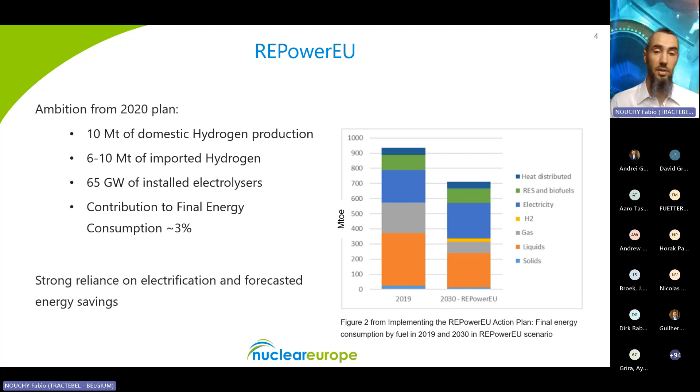So this was the situation in 2020, and this year there was a position on the targets for the 2040 climate goals that has to be undertaken by the European Commission in order to get closer to net zero by 2050. The target is a net reduction of 90% of emissions - still very ambitious, which comes in hand with 20 to 35 megatons according to the different scenarios of renewable.

It's stated clearly as renewable-based hydrogen, so this is domestic production. However, what came back was a redimensioning of hydrogen production at the horizon of 2030. So although we were talking about 10 megatons before, which seems in line with an ambition of 20 to 35 megatons, as Félix said before, the reality seems that both the demand on one side and the projects that are going to produce hydrogen domestically is limited to some 3 megatons. And still, this is still not...

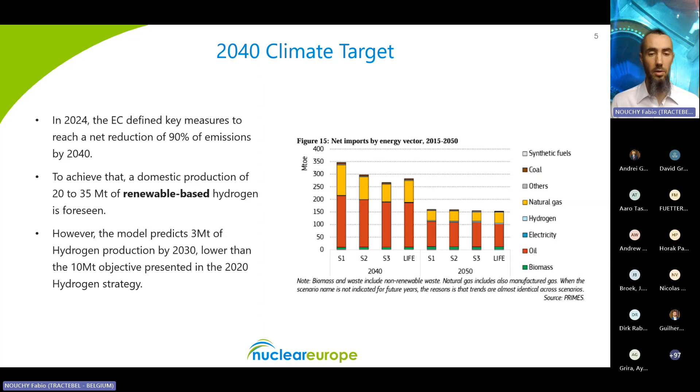So we are going to now dive deeper into the difference between imports and domestic hydrogen.

So just to align ourselves, when we talk about the hydrogen value chain, we often think mostly about the upstream part: the generation of the electricity needed, or the fuel needed as feedstock to produce hydrogen, the transmission of this, and how to convert this fuel or power into the molecule of hydrogen. We must not forget there is also a downstream part, which includes compression and storage, and a transport part if the end user is far from the production site.

And of course, in this ecosystem, a very important part is played by the off-takers. That may be mobility, future stations powered by hydrogen, future hydrogen-powered vehicles, or heavy industry, for example steel producers, or yet other uses like hydrogen as a feedstock for other chemicals, such as sustainable aviation fuels.

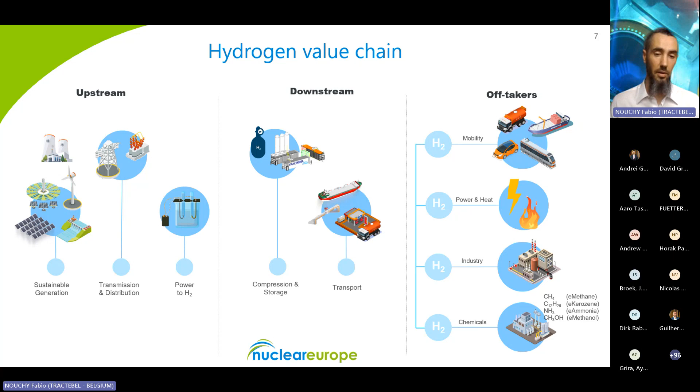So the tendency lately in looking at the overall hydrogen production system has been to leverage existing infrastructure, with some complementary development, by especially leveraging production at those best-in-class renewable fields, which usually are not located in the same place as the end users.

This comes with an upside: the upstream cost, the production part, can be quite reduced because of the possibility to connect electrolyzers directly with renewable fields in areas where solar or wind power is abundant, abating the upstream cost.

However, the uncertainty and impact on the downstream cost is the downside, due to the expenses in compression, storage, decompression, transport, decompression again, and insertion into the local network systems.

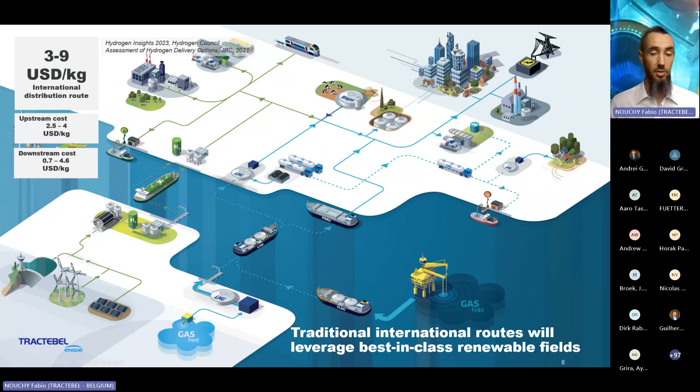So we're already anticipating here the presence of, for those who know Tractebel, the small modular reactor in its place as a cornerstone in the energy ecosystem of tomorrow. On one side, complementing with its flexibility the intermittent renewable energy sources, but also complementing with heat, district heating or industrial heat.

In any case, the point here is that the possibility to be in proximity to the end user would heavily reduce the uncertainty and impact of downstream costs on the cost per kilo of hydrogen.

This is not limited to SMRs, but applies to any domestic production, whether by conventional existing nuclear power plants, it has its advantage, and we will delve deeper later into the upstream costs, how to reduce that part, and what its impact is.

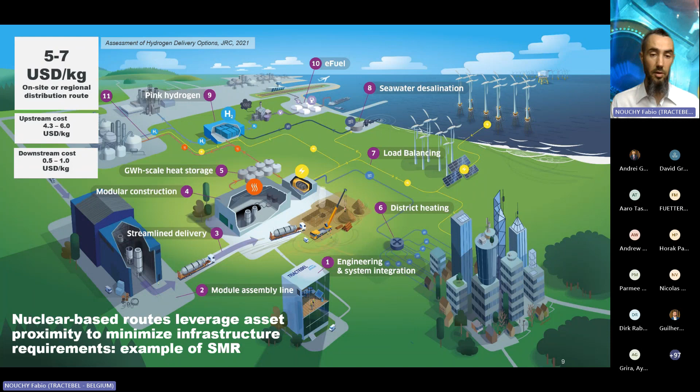So not only economic advantages on one side through the reduction of uncertainties, but also on the other side, the possibility that domestic hydrogen production can offer for the reindustrialization of Europe.

Europe has seen in the last decades a very important loss of value from industry in its economy. That comes hand in hand, unfortunately, with the loss of jobs that are often high-skilled, high-value jobs in the manufacturing industry, and with that, also economic losses.

So there is the possibility of having an energy hub in which end users capitalize from a co-located energy source, with feedstock for their use of hydrogen produced nearby the site.

Of course, this has a lot of implications in terms of security of domestic production, again jobs, overall energy efficiency of the whole system, and of course, this time the possibility of decarbonizing the economy, as it is our target to do.

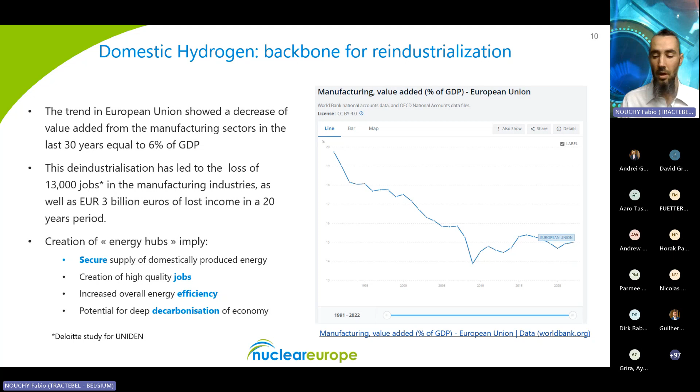So as we spoke about in the slide before, the aspect of using existing nuclear has a very important impact that we want to highlight here.

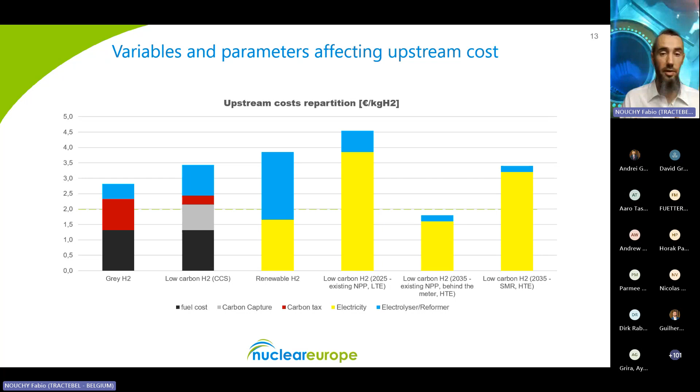What I want to show here is the impact - considering you may have a lot of questions from the slide before - that these different parameters bring to the upstream cost of hydrogen, for which we took a hypothesis on one side of a carbon tax.

100 euros per ton of CO2, which is impactful especially for gray hydrogen, and at the level of low carbon blue hydrogen, the one coming from carbon capture and storage, it's mostly the technology of carbon capture that is raising the price of production.

Renewable hydrogen, despite having the possibility of a cheap LCOE, if coupled behind the meter to the hydrogen production installation - electrolyzers with nowadays efficiency of 55 kilowatt hours per kilogram of hydrogen produced - the impact of the low capacity factor, around 2,500 hours per year versus almost 8,000 hours per year that nuclear can provide, is a big handicap for renewable energy sources.

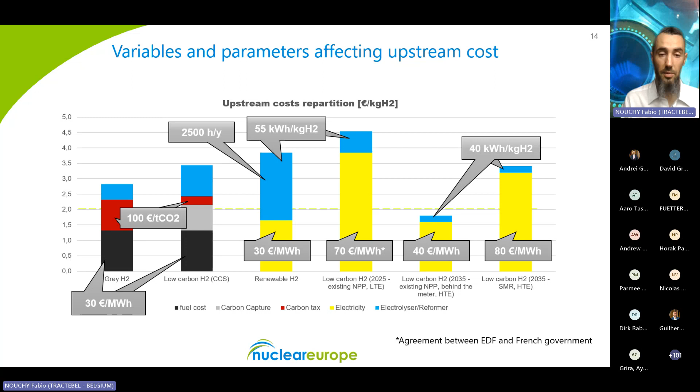I conclude here with the policy recommendations we have in the paper for the European Commission: the importance and focus we must give on diversification in the approach to hydrogen production, highlighting the importance of energy sovereignty.

This diversification is highlighted at the end of this slide with the fact that the nuclear industry is asking for a technology neutral approach when talking about low carbon hydrogen, so that all technology sources should be treated the same way.

For that, you need policies to support financial incentives, regulatory frameworks, collaboration initiatives, and investments in infrastructure, focusing on making the whole system more efficient. This means prioritizing proximity to end users with an eye on cost effectiveness.

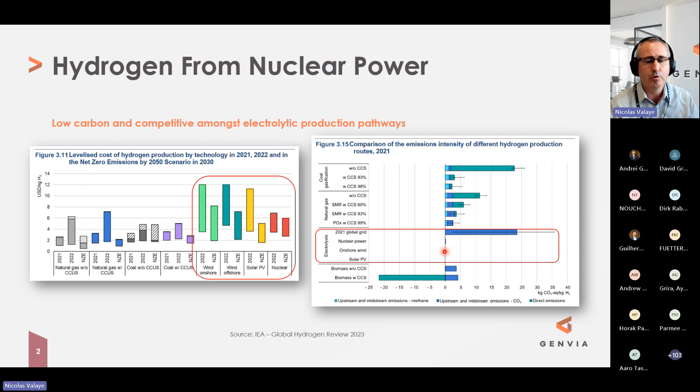Now a bit on producing hydrogen from electricity, the electrolytic production pathways. On this graph, on the left we have low temperature electrolysis with liquid water—technologies like alkaline and PEM. With results from the first hydrogen bank auction, almost all of the projects used either one of those technologies or a combination of both.

Alkaline is the most mature, used for many decades. PEM is newer but has started its industrial phase as well. Both technologies have advantages and disadvantages, but the main thing is we're now starting the industrialization phase and the cost reduction phase.

From a world standpoint, we don't yet have the return on experience with large systems. The first large systems are being planned and funded, but not yet in operation. There's still a lot of learning curve in scaling up for large applications, but the technology is there and is mature, so projects can be initiated if off-takers are secured.

On the right side is high temperature electrolysis. There we don't electrolyze liquid water, but steam—water in the vapor phase. This is sometimes called high temperature steam electrolysis, solid oxide electrolysis, or solid oxide cell, SOEC—you might see all these acronyms. The rest of my presentation will focus more on that technology.

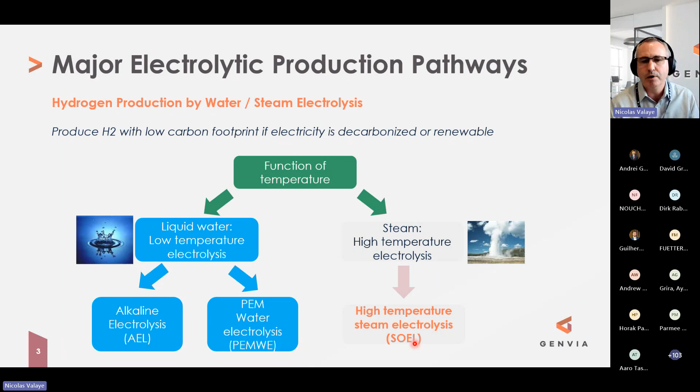In the context of nuclear coupling, which is this webinar's focus, for alkaline or PEM you'd simply connect electricity from nuclear to the electrolyzer. You can do the same for solid oxide electrolysis, but in addition you can valorize heat or steam produced by the nuclear facility. So for solid oxide with nuclear coupling, you do both electrical coupling and heat coupling—I'll come back to why we want that.

What's interesting with solid oxide technology is that at its core is a solid oxide cell put into a stack, with modules forming large systems. The unitary block, the stack, is versatile—this has been demonstrated and used by most solid oxide players. We can use the technology to produce hydrogen: at the inlet you have steam and electricity.

You can also use the same stack, same equipment, same core module in fuel cell mode—called solid oxide fuel cell. There are different applications, particularly maritime, where you supply a fuel such as hydrogen, ammonia, methane, or methanol. At the exhaust you generate power and electricity, but also heat. The efficiency in fuel cell mode is quite good even using just the power, but if you can also leverage the heat, you have a very energy-efficient system.

If you design a system around that stack leveraging both modes, you can have a reversible system. It's called the RSOC, reversible solid oxide cell. You could envision a use case where you produce hydrogen when you have excess energy on the grid or from solar, and then produce electricity back to the grid using fuel cell mode when you don't have that energy source.

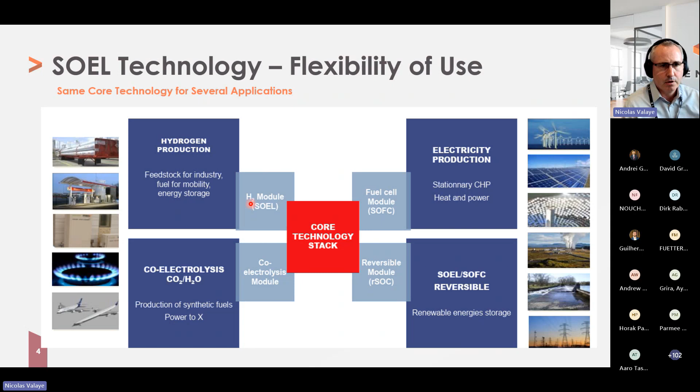Going a bit deeper on the technology, but I won't go further than that—I promise the rest of the presentation will be less detailed technically. One important thing: it's ceramics based, so it can scale. There's no expensive material like platinum, so it's really scalable in terms of materials used at the heart of the technology. You inject steam at the cathode, get hydrogen back, and on the anode you have an air sweep to help move out the oxygen produced on the other side. That's the core of the technology.

The graph on the side is a thermodynamic graph, and I'll use it to explain a couple of things. The promise of solid oxide is up to 30% better electrical efficiency compared to low temperature electrolysis—you need 30% less electricity to produce the same amount of hydrogen. Given that 70 to 80% of hydrogen cost comes from electricity, that's a game changer in the electrolysis world, which is why this technology is high on the agenda for industrialization.

But this 30% gain comes from two things. First, this is the total energy to create hydrogen and oxygen molecules out of water, including the vaporization stage of liquid water to steam. If you have an external source of energy to create that steam instead of using electricity, you save about 15% electrical efficiency.

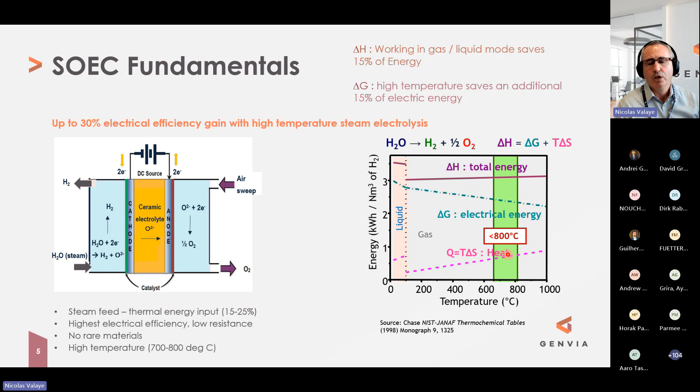So that's what I wanted to say on this slide: 15% efficiency gain from valorizing an external heat source, and further electrical demand reduction because we're able to leverage the heat produced from the system. That can be summarized in this graph—for solid oxide electrolysis technology, you need about 39 kilowatts of electrical input per kilogram of hydrogen at the inlet, plus about 9 kilowatts of thermal input to produce that steam.

And there you go, you have your molecule of hydrogen, with a bit of residual losses. Low temperature electrolysis technologies have an electrical input to the technology of about between 50 and 55. They do produce the same molecule of hydrogen, but they have to get rid of the thermal losses that is part of the technology, which Genvia can valorize with the solid oxide electrolysis.

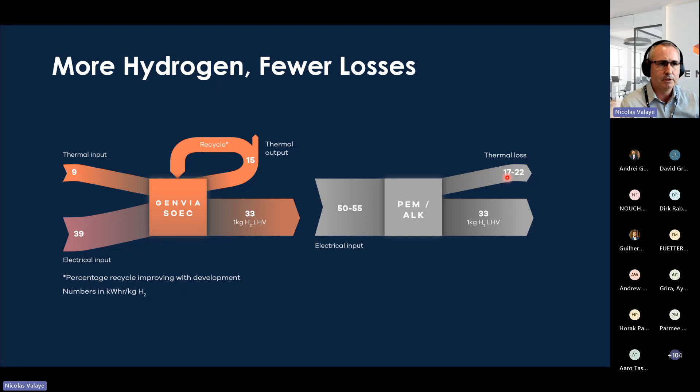So the bottom line there: if you have low carbon electricity, if you have a source of heat to produce the steam, whether it is coupled with a nuclear source or it comes from an industrial setting, and the heat you have access to is cheaper than electricity, or cheaper than what it would cost to generate the steam through electricity, then you improve your efficiency and you basically have this higher efficiency of the system. That's why I'm saying the solid oxide is definitely the preferred technology to couple with nuclear for the production of hydrogen.

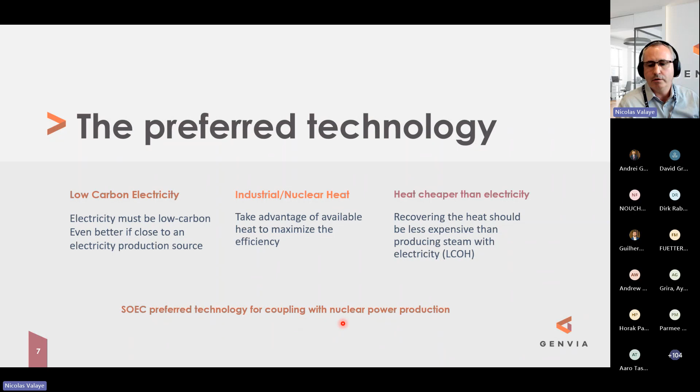Now, producing hydrogen is great, but we have to think about also applications of it. So applications where we do have heat coming from industry, that's the left side. Solid oxide is also a preferred technology where there would be lots of heat that is not necessarily valorized in an industrial process. As examples: steel, chemicals, ammonia production, methanol production, refining, heat industries, glass production, aluminium.

So all those, they have in their processes, they're trying to electrify. They are somewhat part of the process, but not everything can be electrified, and they still need gases to reach the desired temperature. That's part of the process. And there, Genvia or solid oxide technology can be a source of use of that heat and produce hydrogen at a lower cost and at a better efficiency.

Another use case, not necessarily bigger, but one which has a bit of momentum these days, in particular thanks to REPowerEU in Europe and the drive to decarbonize the maritime and aviation sectors. For synthetic fuel, the process of producing ammonia via Haber-Bosch, or the methanation process, or Fischer-Tropsch process - those are exothermic, and the solid oxide technology can use some of that heat to produce the hydrogen needed by the process, thereby improving the efficiency.

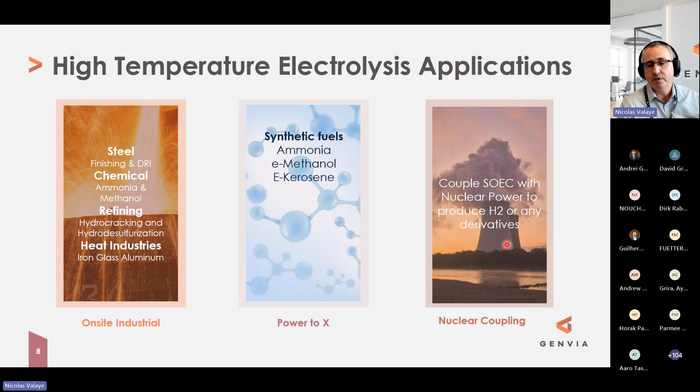And in terms of production, I already covered a bit of that. If we don't have enough heat from some of those processes, or we are maybe in the context of a hydrogen hub, but then coupled with using a nuclear source to provide the base load production of hydrogen, then we can leverage either some heat or steam generated by the plant at a better efficiency than if we were using electricity somewhere else. So definitely some advantage there.

As mentioned earlier, solid oxide technology is a bit less mature. So the key factors that we are focusing on as an industry, and Genvia as well, is to keep improving the efficiency, the electrical energy needed for each kilogram of hydrogen, by maximizing the use of the heat.

But technology is great, but you need to be able to manufacture it. So lowering down the cost of each unit, so the capacity of production, scaling up manufacturing, and introducing fully automated manufacturing, so to control what you produce and to reduce the degradation of everything.

And today, solid oxide cells are known to have - there's some area of progress - the duration of the lifetime of the technology. That's something obviously everybody's working on, and there's roadmaps to achieve better lifetime. But at the same time, if you produce those components very cheaply, then we can just consider them as consumables of the project and be part of the normal operation in a bigger plant.

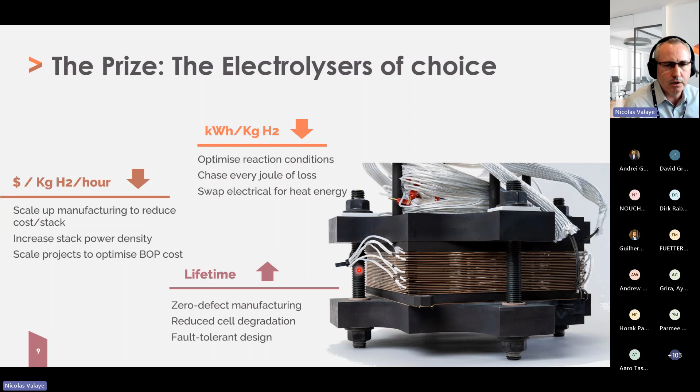A couple of words on Genvia before I give back the microphone. Genvia is a public-private partnership between five partners. We are based in France. Our mandate is to mature and industrialize high-efficiency solid oxide electrolyzer using technology developed for the past 15-20 years by the CEA in France, a leading research center.

The two largest shareholders are the CEA and SLB, ex-Schlumberger. We have three other partners: the inventor of cement Vicat, the group Vinci, and also the ARIS Occitanie, a region in France who has invested in Genvia. We were able to start - the company was created in March 2021, so a bit more than 3 years ago.

We were able to start very quickly because we had a lot of employees seconded from the parent companies to join, with a lot of expertise joining in very quickly.

We are a laureate of the IPCEI in Europe for hydrogen, the Wave 1 Hy2Tech, both on the fuel cell and the hydrogen production side. We are one of the 10 projects supported by France, and we are grateful for the support.

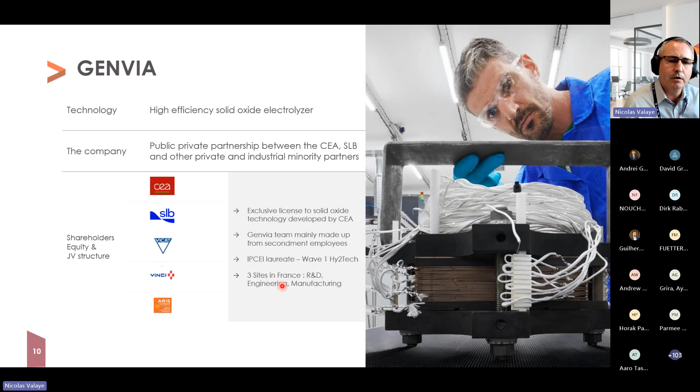We have 3 sites in France: manufacturing in Béziers in the south, R&D in Grenoble co-located with the CEA, and engineering in south of Paris co-located with the engineering center from SLB.

Just a couple of things on achievements. We were founded in March. We were lucky to be able to leverage a building made available to us, a large facility in a plant where there is already some manufacturing from SLB. So having access to land, to the structure of a building already, and a lot of competence for manufacturing 4.0.

6 months later, part of the building was dedicated to a workshop where we had the transition, the technology transfer from the lab to the industry. At the end of the year, we were able to produce the first edition of our second generation stack in Béziers. After that, we converted that workshop into a module assembly facility, and in the rest of the building, we developed our R&D pilot line, which we inaugurated last year.

That pilot line produced the stacks needed for our own development, and they will also be producing all the stacks we need until we have the fully automated lines from our gigafactory operational.

So we are working these days on deploying our first system out of our building. We have a system being deployed in ArcelorMittal in 2025. That system is being tested in Grenoble as a replica without the heat integration from the industry, and each module will be factory accepted and tested in Béziers using the same configuration.

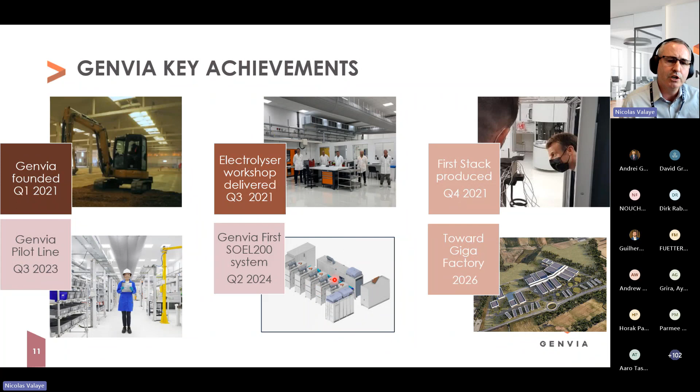For new concepts, for new plants, especially SMR, then we can couple at 150, 200 degrees. And for other generations of modular reactors in nuclear, you could envision different types of couplings. Some are advantageous, some are disadvantageous, but there are different options that can be explored.

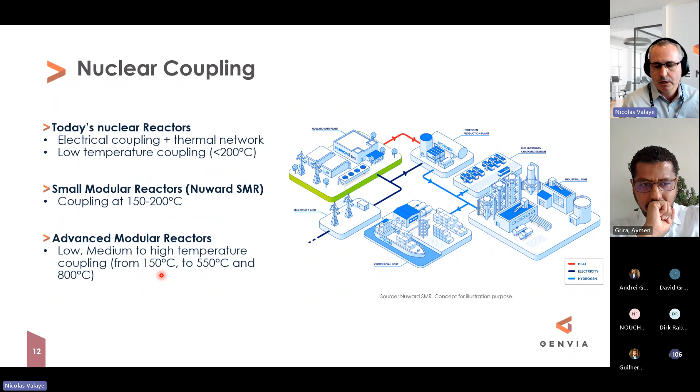And with that, I will give back the microphone to Aymen.

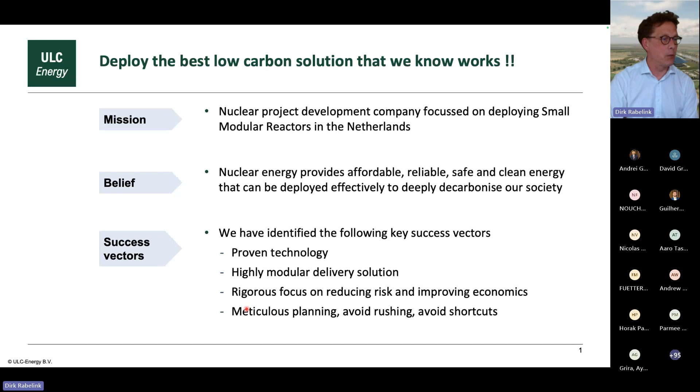So we're not doing this by ourselves. ULC-Energy is a project development company, and essentially what we do is bring together all the parties involved in the realization of a nuclear power project. We've put in place a number of strategic agreements. We actually started off on the spent fuel management strategy and recycling strategy. We want to take full ownership of the full cycle.

We selected Rolls-Royce SMR; we have an exclusive arrangement with them for the Netherlands. We also have a cooperation agreement with Constellation, the largest producer of clean energy in the US and operator of 23 nuclear reactors there. And we have recently signed an agreement with BAM Infra, the largest construction company in the Netherlands, who is working with us to deliver this Rolls-Royce SMR solution in the Netherlands.

One of the key differences, which links into the hydrogen space, is we very strongly believe that traditionally the way we've thought about nuclear is probably not reflecting the full potential, particularly not in a decarbonizing world with much higher sources of intermittent energy in the system. Traditionally, even in the existing formal plans of the government and research organizations, people think a nuclear power plant needs a high load factor because it's an expensive piece of equipment, so it needs to run all the time, and it's only delivering electricity on the grid.

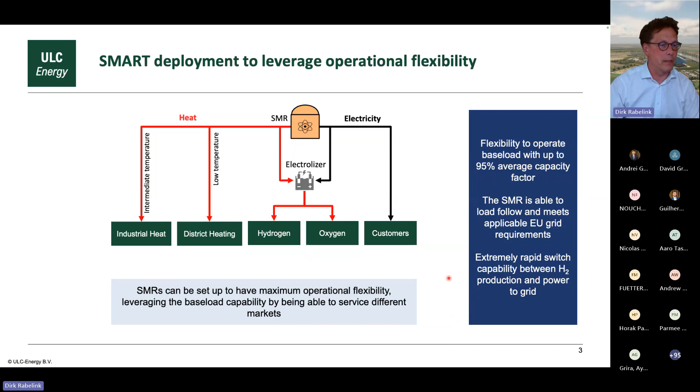So this was exactly the topic of a study that we conducted. Of course, I want to pay full respect to our technology partners.

Topsoe we brought in as the Danish technology company with their solid oxide cell technology. Topsoe has been working on this for a considerable time. They've started working on their 500 megawatts capacity factory in Denmark. And it's been very exciting to work with them on what this technology can do.

Of course, Rolls-Royce SMR, very modular, pressurized water reactor. From a nuclear perspective, it's what we want it to be, which is relatively boring and straightforward. The uniqueness of Rolls-Royce is in how the project is delivered and the extent to which the power plant, the complete power plant, is delivered in a highly modular way, which we think addresses a lot of the risk and execution timetable challenges.

Rolls-Royce SMR is the only SMR that is currently going through a regulatory process in Europe, and that's in the UK, in their home country. We expect them to finish their step 2 in due course this year and immediately go into step 3, which is their final generic design assessment step.

I've explained a little bit about ULC-Energy. We were the project coordinator for this exercise. We solicited engineering and costing support from McDermott. McDermott is a large EPCM contractor, engineering services, US headquartered, but they have a very significant presence in the Netherlands.

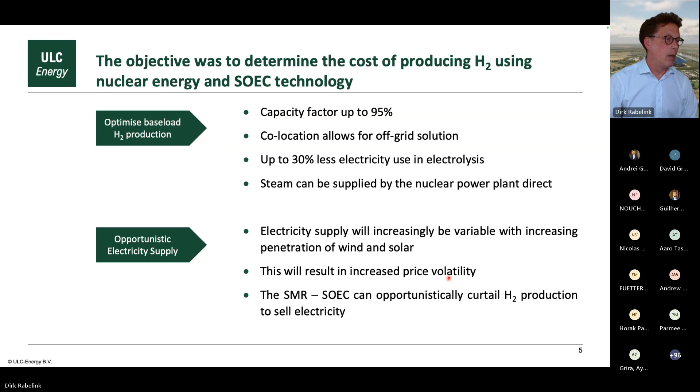So what did we do? We basically received the SMR and solid oxide cell CapEx and OpEx inputs. In some cases, we've also had to complement the OpEx numbers with benchmarking against other industrial processes. But the main input there was provided by Topsoe and Rolls-Royce SMR.

The integration between the SMR and solid oxide, apart from electricity, is the heat integration. So we've optimized where we take the heat from in the reactor, and how we optimize that heat exchange into the solid oxide. We had to cost the balance of plant for the solid oxide and the heat integration between the two.

We then developed a cash flow model to determine the price of hydrogen at which stage the NPV of this project is zero. And that's essentially representing the cost of hydrogen that we calculated.

The second piece was the development of the market model. We put our market model out to 2050. We didn't go much further beyond that because we thought 2050 was the right time. We looked at the assessment of additional revenues for these opportunistic sales of electricity into that marketplace. That model is an hour-by-hour model based on a wide range of weather data, and as you can imagine, those calculations get quite complex.

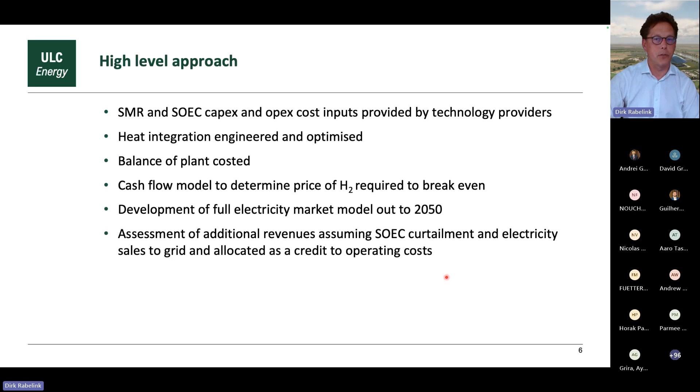So what did we confirm? We confirmed that in our baseload hydrogen production mode, we can produce at just below €3.50 per kilogram, that's 2024 euros. And when we do this opportunistic operation, we can bring that cost down to below €2 per kilogram, 2024 numbers. And what you can see is the value of that flexibility—of course, this is based on modeling of future flexibility.

You have to always take that, like the disclaimer on your credit card, as being subject to assumptions, and real life is going to be different. But the input that went into that assessment—we put a lot of work into validating that it's a reasonable volatility that we're introducing.

What the study also confirmed was that Rolls-Royce SMR and Topsoe are both very modularized and factory-delivered technologies. That means the scaling part of this is going to be easier than with any form of stick-built or alternative traditional construction methods. We can deploy this at scale, but also smoothly integrate it into existing and developing energy systems.

What's really important in this space is that what we're seeing, at least in the Netherlands—and I think it's starting in several other countries—is very severe grid congestion challenges. The high degree of intermittent energy on our system is causing a lot of challenges. Essentially, the way we organize our grid, the actual amount of copper we have in the ground, and also the rules on how we connect people are not necessarily fit for purpose, and we're struggling.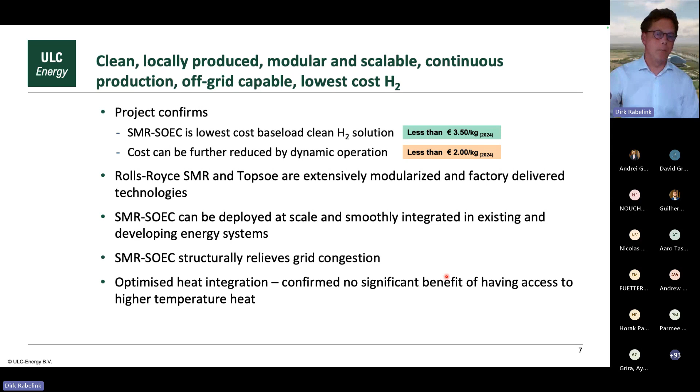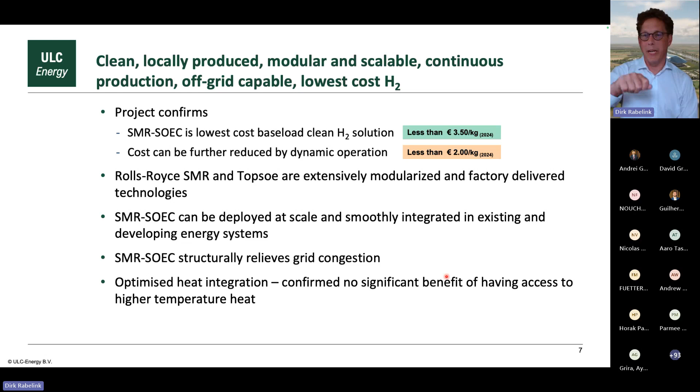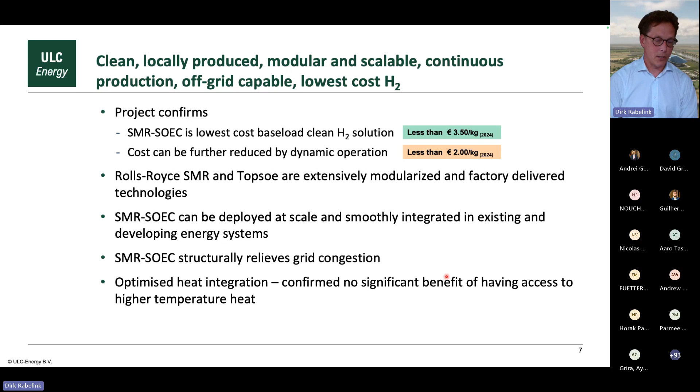So to the previous speaker's point, we have confirmed that we don't see any significant benefit in having higher temperatures. That's essentially because in the solid oxide process, you have heat recovery from your exhaust gases. So we assessed what the demand for hydrogen is—well, there are very few cases where you need hydrogen at 700 or 800 degrees, and very likely you're going to have to cool that down. We cool that down by heating up the steam to operating temperatures. So it's a very important point that we confirmed as well.

That's great. Thanks, Dirk, for being ahead of schedule, really nice insights and information with all of us. I think it's good that we're seeing feasibility studies and the first projects happening in Europe, combining nuclear, whether SMR or existing nuclear power plants, and hydrogen SOEC technology to produce hydrogen.

So quick question to you before we start the Q&A session. We have questions coming from the audience. We hear a lot about the combination of high temperature advanced reactors with high temperature electrolyzers. But you are using more common PWR technology in your studies here, which is delivering around 300 degrees Celsius of steam. What is your perspective on the benefits of higher temperature? I know you stated your conclusion clearly, but I'd like to hear more about your perspective.